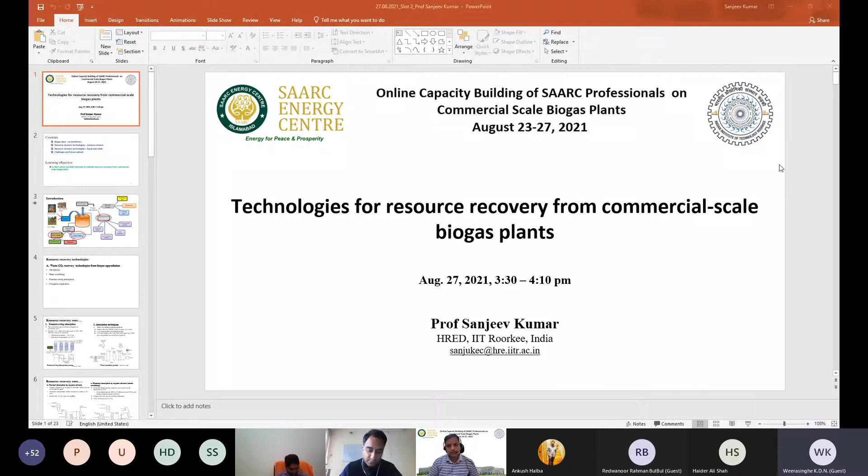So I was talking about the problem with the commercial viability of biogas plants. Until and unless we recover the resources from the waste stream of the biogas plants, a commercial scale biogas plant cannot be a viable option. So that's why I've taken this short lecture on this topic, on technologies that can be applied for resource recovery from commercial scale biogas plants.

The content covered will be like biogas plants as a biorefinery approach. When we are extracting more than one kind of product from a plant, it may be considered a biorefinery, particularly when we are talking about bioenergy engines. Then resource recovery, like the gaseous streams that are available in biogas plants.

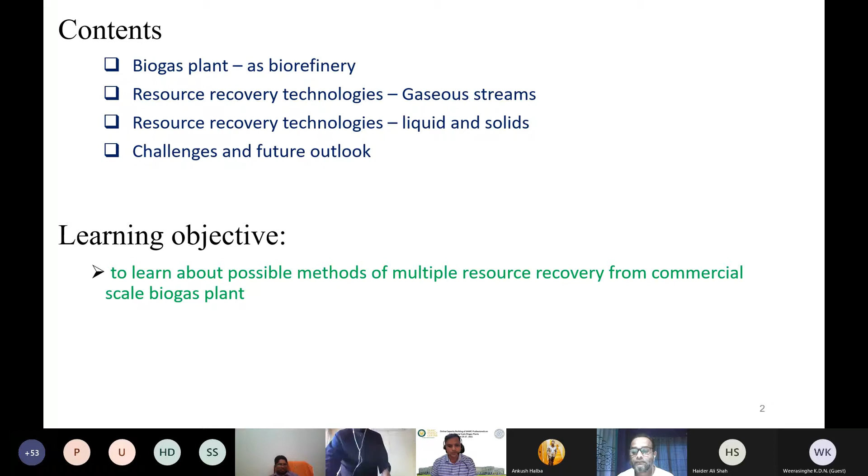So those will be taking some discussion on that also. And then the solid and liquid part, and the challenge in the future outlook with respect to resource recovery. The overall objective of this lecture is to have some idea on the methods that can be applied for

the resource recovery from commercial scale biogas plants. I think this picture is known to everyone, everyone knows what is happening here. But the interesting thing is that these three things - the CO2 coming out from the biogas purification unit, and the digestate, either the liquid part or the solid part - these are considered as waste.

Usually from the biogas enrichment unit or the biogas purification unit, CO2 is directly discharged to the environment, which is causing lots of problems. At the same time, the slurry, in some cases, is being used as a fertilizer. In some cases, the amount of generated slurry is too much, it cannot be applied completely to the field, so in that case it again creates some problem.

So I believe that rather than looking at these streams as waste streams, we should focus on recovering the resources. As we know, the solid and liquid are rich in nutrients, so if we can have some technology for recovering the nutrients from these systems, it will be very good.

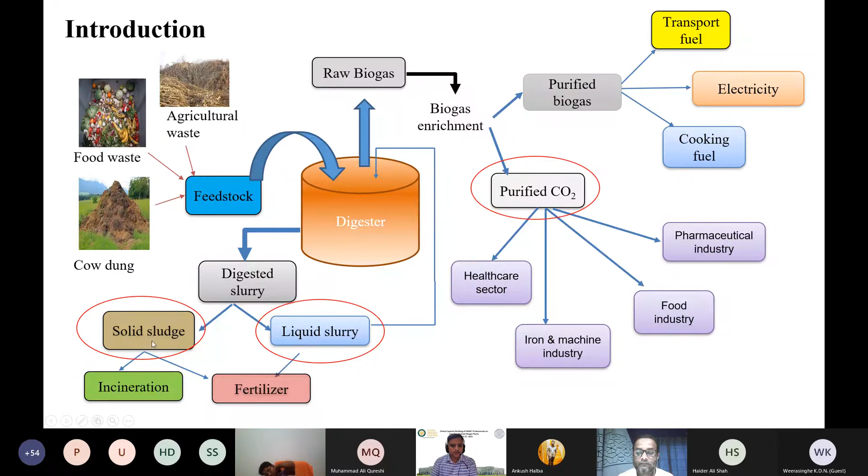Similarly, there are several commercial applications of CO2, like healthcare, iron and machine industry, food industry, pharmaceutical, etc. So if we can purify the gas which is coming out from the biogas enrichment unit, that will be good - we can use it for commercial applications and then sell it. So I will be talking about these three options: solid, liquid, as well as purified CO2.

Coming to the gaseous resource recovery, we know that there are several methodologies by which we can purify the methane. When we talk about biogas purification, we always talk about methane recovery, we never talk about CO2 recovery. What we do is use some technology for improving the concentration of methane in the final biogas or

the compressed biogas which is coming out from the enrichment unit. And what we do is release the CO2 to the environment for the regeneration of the material that is being used for the purification of the biogas. So that is the common practice in most commercial plants throughout the world.

But this release of CO2 to the atmosphere, either in water form like carbonated water coming from the water scrubbing unit - when it comes to atmospheric pressure, the CO2 is released. So the focus should be on how we can utilize that waste stream of CO2 into a marketable product.

So these technologies, those available for biogas purification, the same reactor can be used for the recovery of CO2, but we have to manage how we can collect that CO2 and how we can purify it. So these are the methods: absorption method, water scrubbing method, pressure swing adsorption, and cryogenic separation. I'll briefly cover these things.

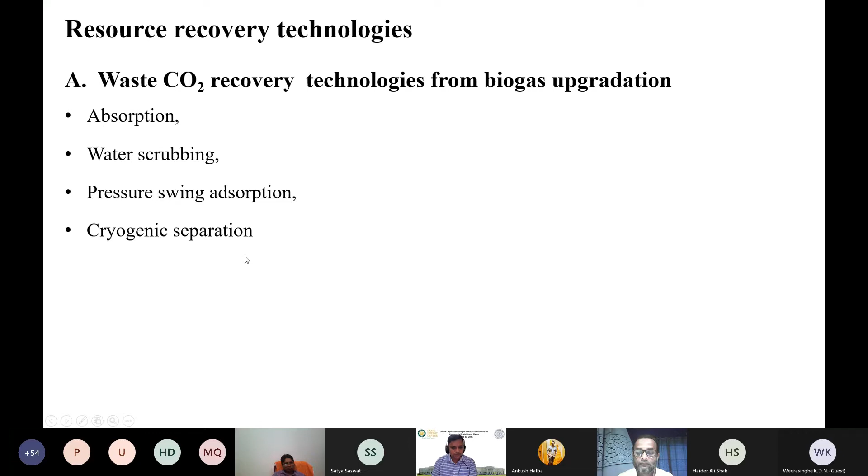If we talk about pressure swing adsorption, usually the gas molecules are trapped on a molecular sieve. When we pass the gas through different towers, the impurities in the biogas like CO2, H2S, ammonia, and vapors will be adsorbed in the adsorbing material. This is how we are getting the methane.

Then during the regeneration stage, this gas, known as the exhaust gas, is released to the atmosphere, having a high concentration of CO2. So in this case, our focus is to recover that CO2.

Similarly, in case of absorption techniques, the first class of absorption technology is water scrubbing, where we usually use the dissolution of gases and vapor in the liquid. The principle is based on how the gas can be solubilized in the liquid phase or the vapor can be solubilized, and it is done at low temperature and high pressure.

During this process, the CO2 and other acidic and basic impurities in the gas are absorbed in parallel, and the biogas is cleaned - we can say the biogas has been enriched.

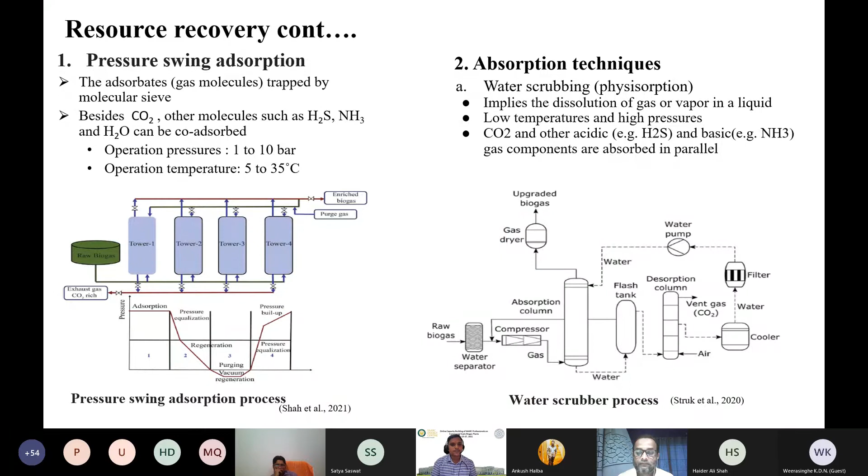Similarly, there are physical methods using organic solvents. There are several marketable solvents available in the market, for example polyglycol, dimethyl ethers - those serve as an absorbent, being the organic reagent. They can selectively absorb CO2 and some of the impurities from the biogas, and we will be having this off-gas which again has a high CO2 concentration.

Similarly, coming to chemical absorption by organic solvent, in that case we use amine - for example, monoethanolamine is one.

And there are some other examples also. These are the compounds used in chemical absorption by organic solvents. Again, we have the off-gas, which contains 80 to 90% of the CO2.

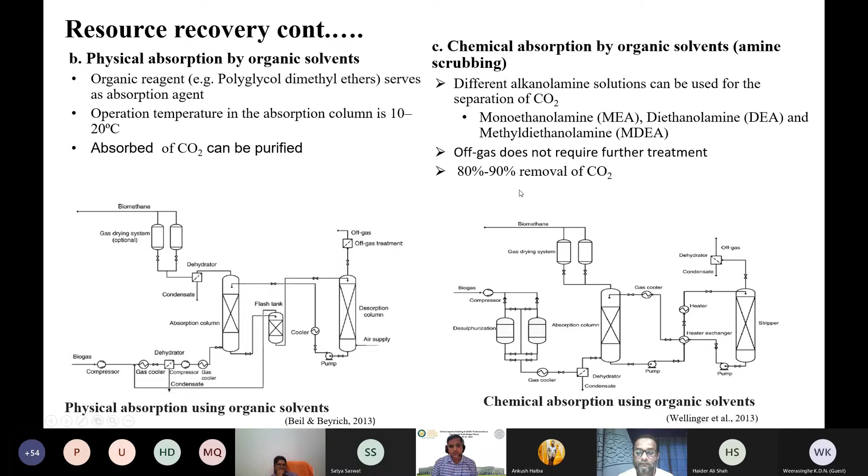We have seen that in most cases, when we talk about membrane separation or cryogenic separation, what we are doing is removing the CO2 and impurities from the biogas and releasing it to the atmosphere as exhaust gas or off-gas. But I will share one case study of how people have worked on this waste CO2.

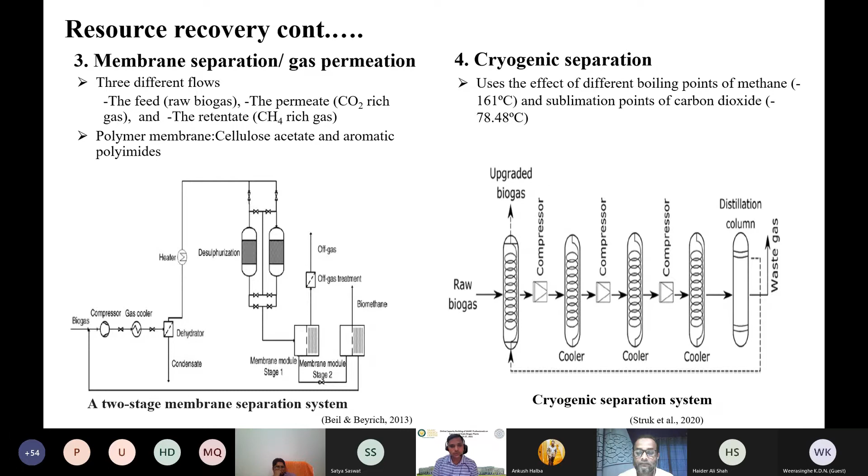Sometimes called bio CO2, it can be converted into food grade CO2. This is an example, the case study of Korskro biogas plant in Denmark. They have been producing food grade sustainable CO2 from a large scale biogas facility.

Coming to the brief background of the plant: they have about 1 million tons of biomass, which contains more than 80% animal manure, and they are able to produce around 49 million cubic meters of biogas per year.

With respect to the utilization of biogas, they are upgrading it to biomethane, meaning they remove the CO2 and inject it into the natural gas grid. Now, interestingly, the CO2 is captured and transferred to the CO2 facility.

After that, the quality of the CO2 will be food grade, because they have claimed and analyzed that almost all impurities are removed, whether nitrogen compounds or H2S. Everything has been removed from the bio CO2 or purified CO2.

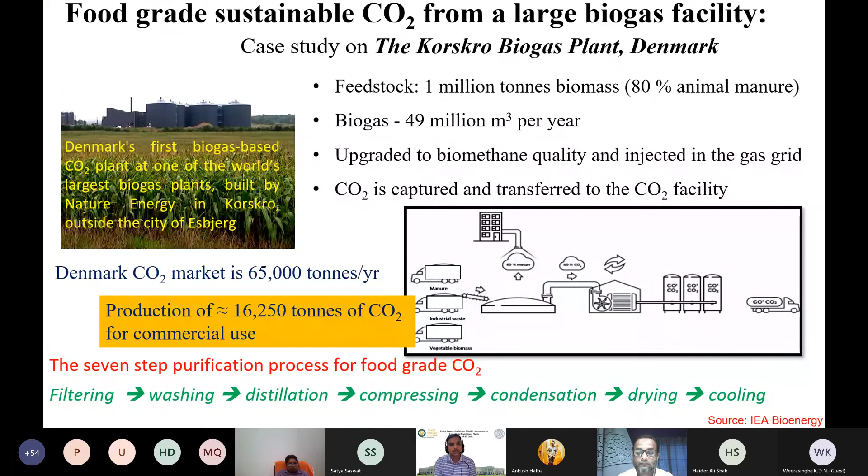Coming to the slurry part, which is very problematic in some cases, because if released to the environment it will create problems for soil and water bodies. This digestate can be used directly if it is in small amounts, or it can be processed into different product components if it is in huge amounts.

The aim of valorizing the digested slurry is to reduce the nutrient load on the remaining effluent and produce marketable biofertilizers. I have seen some plants, one of which we will see in a live demonstration, that have produced more than 40 different products based on biogas slurry.

It should also be processed to reduce the volume of effluent. Sometimes there is technology by which we can recover nitrogen or phosphate from the total liquid, and the liquid can be recycled.

This results in reducing the transportation cost, because the solid part can be easily handled. The problem is with the liquid part, which is very difficult to handle due to logistic issues, like storage and transportation requirements.

And sometimes if we pack it into a small marketable product, people have reported that even after packing it into the bottles, there may be some cases where the biogas keeps producing in that liquid. So there are some challenges with respect to the biogas slurry.

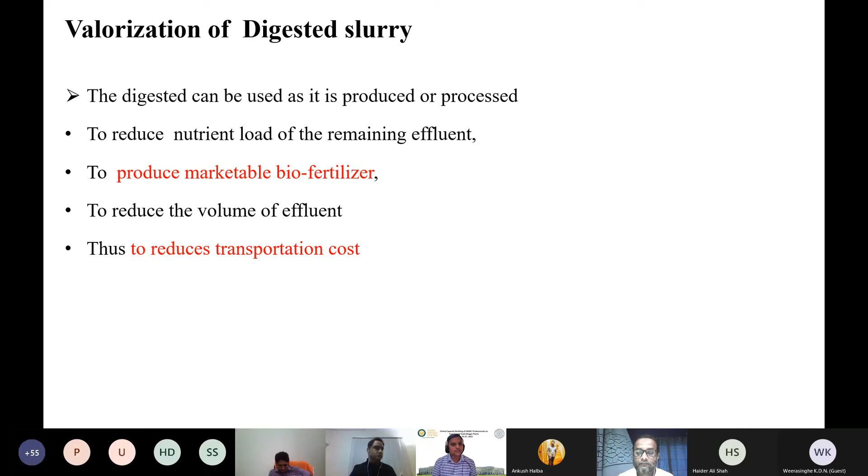So when we talk about digestate processing, one option is digestate conditioning. In that case, we are improving the quality to meet the marketable product. Fertilizer products are available in the market, so we have to meet the quality of the digestate at par with the other chemical fertilizers. And for that we need to do the treatment.

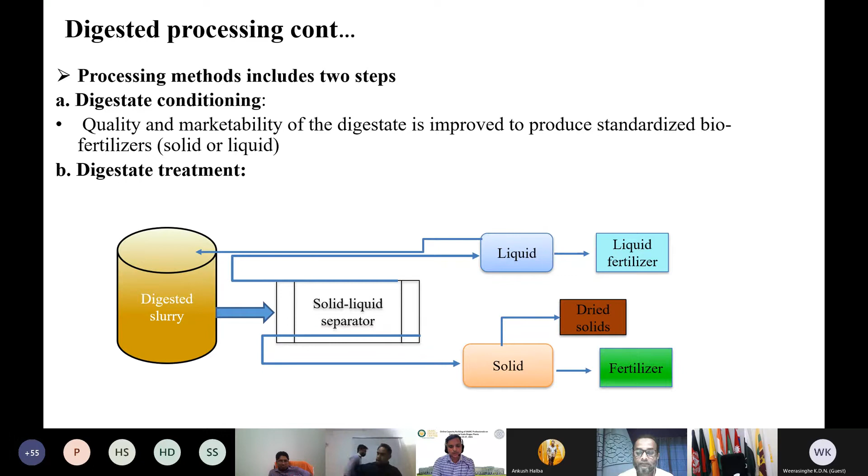So first thing is that we have to use some separator. By using the separator, we can get the liquid part and the solid part separated, and then the solid part we can dry, and obviously during the drying, some of the nutrients like nitrogen and phosphorus may be lost. Or if there are nearby agriculture fields, we can utilize that. And some methods will be there which I will be discussing soon.

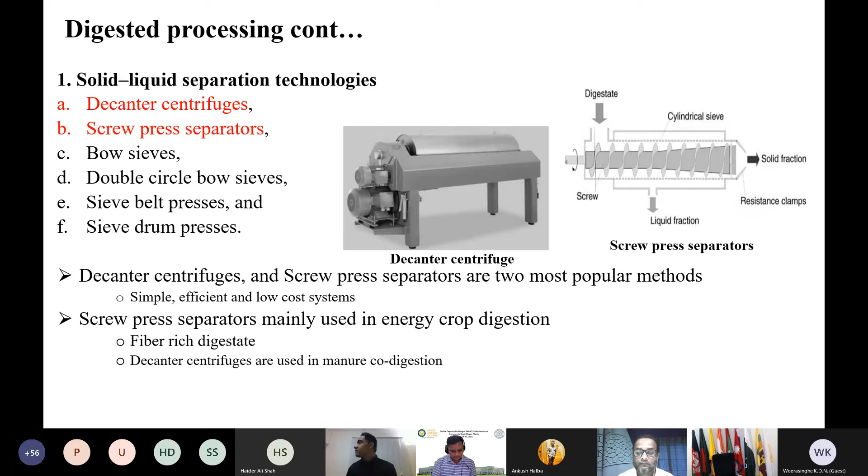So the first stage after we get the biogas slurry is to separate the liquid and solid. We have different machinery that can be applied, but in most of the cases, the solid removal from the liquid part is not very efficient. Even the effluent coming from the decanter centrifuge or screw press separator will have a large amount of suspended solids. That is very difficult to handle, and that will go into the liquid part. The solid part can easily be handled in that case. So these are some examples of liquid-solid separators.

Then the solid and the liquid fraction can be processed. For example, the solid fraction can be used as a soil improver in the nearby area, or it can be taken for composting. It's always good to do the composting before you use the biogas slurry in the field, because the organic fraction in the digested slurry will be low.

So if you are composting it with organic fibrous materials such as wood chips, the organic content in that fertilizer will be improved, and the nutrient availability will also improve because materials like dry leaves and grass improve the water absorption capacity of the slurry. So water retention will be there, and the nutrients will remain in the final product itself. Otherwise, when you dry the slurry directly, there are chances that nutrients will be lost due to the drying.

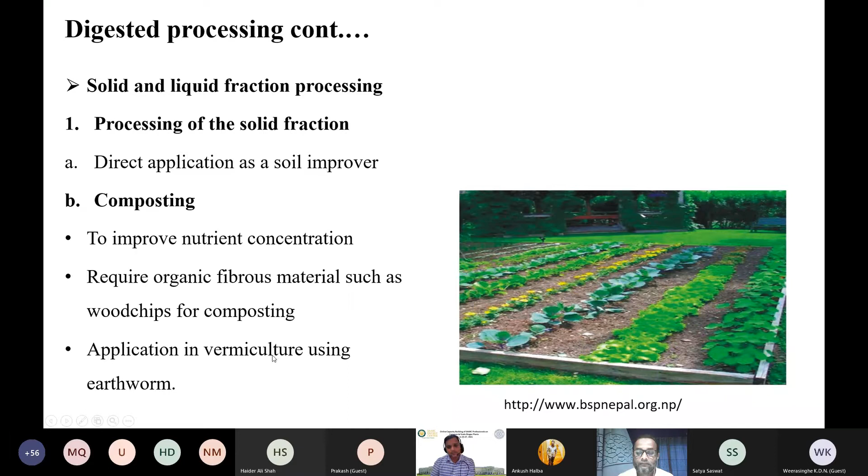Another technique like composting is vermicomposting. With the help of vermicomposting, the slurry can also be processed along with other waste, so that we can get good quality compost or fertilizer.

Drying is one option. As I told you, it can be done through different routes, like solar radiation. And sometimes if the biogas plant has a combined heat and power unit, they will be generating excess heat that can be utilized for drying the slurry. But it should be noted that whenever we dry the solid part, some of the nutrients will be lost. And the dried slurry can be used in different applications, including horticulture and gardening.

And one good example is mushroom cultivation. When we go for mushroom cultivation, we have to use agro residue. Along with the agro residue, if we use the dry slurry or the dry part of the digestate, that improves the mushroom cultivation.

And coming to the processing of the liquid fraction, we can use it directly if it is feasible. But if we have to transport that complete liquid to a different location, obviously the transportation cost will be very high. And if the volume of this liquid fertilizer is very high, storage will be a problem. And as I told you, there are cases where biogas keeps generating from the liquid part of the slurry, which creates lots of problems. So it's better to process it.

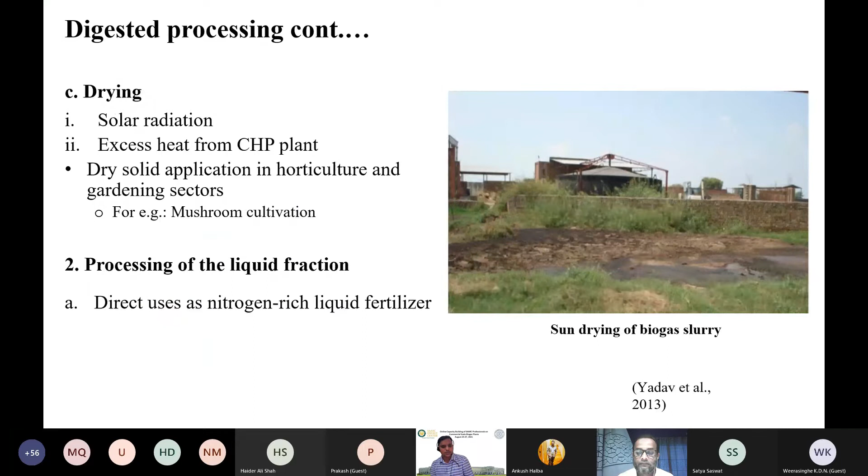In some cases we can do ammonia recovery from that liquid part. Ammonia stripping is a process which can be applied to the liquid part for recovery of the ammonia, and then the ammonia can be utilized for making fertilizer. It produces low pH ammonium sulfate. This low pH ammonium sulfate will be a very good fertilizer in case the soil has alkalinity or neutral reactions.

So sometimes we have to decrease the pH of the soil, and the ammonia recovered from the liquid part of the digestate can be used to make ammonium sulfate with low pH, and we can use it as a fertilizer in some cases.

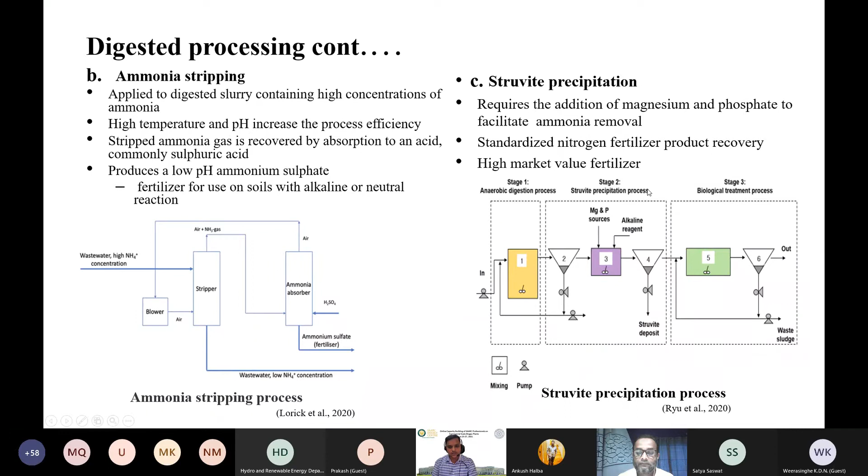nutrients. So one thing is that we are recovering the slurry part, we are separating the liquid and solid. That is one thing, but ultimately, just to reduce the volume of the liquid part, we should focus on the recovery of the nutrients, and we can concentrate, we can crystallize them, or we can use them along with some salt, and then we can use them as a fertilizer. Like here, we are having the nitrogen fertilizer or ammonia fertilizer. In the second case, when we are focusing on the phosphate, we can get the phosphate as a fertilizer. So these are some options that can be applied in the field also.

Now one more thing which I missed to mention: we are talking about the recovery of nutrients, the recovery of fertilizer, the gas recovery. But what about the water? You all know, to operate our biogas plants, we have to dilute the substrate. In case of cattle dung, we have to mix it with an equal amount of water to make a slurry. So when biogas plants are at large scale, obviously their water requirement will be very high.

So there have been some studies where people are talking about recycling part of the liquid digestate. It can be done, people are doing it, but we cannot recycle the complete volume which is coming out from the digester back to the digester. In some cases, it may create ammonia inhibition, like ammonia accumulation may occur in the reactor, and in some cases the volume will be reduced because of this extra liquid part in that reactor.

So to avoid this, we should have some purification technology by which we can purify the water after recovering the nutrients. We should purify it, and we should look forward to recycling, or at least to using it in the process, including cleaning of the utensils in the plant or the pipelines, as process water.

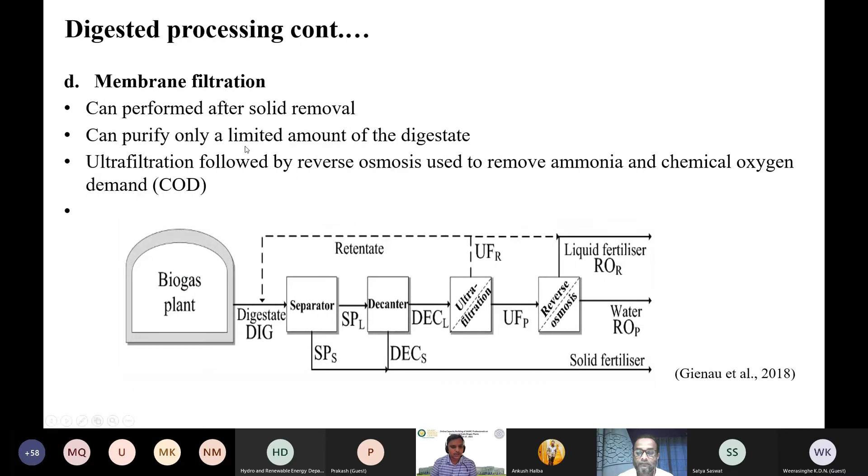Related to this, I have got an interesting case study which I'm sharing here. It's a plant in Switzerland. They are based on manure, bio waste, and industrial biogenic waste, and their total production capacity is around 3.4 million cubic meters per year. They are converting it into biomethane, giving it to the gas grid, and saving around 19 gigawatt hours of natural gas annually with one plant.

And this is the input and output. You can see that pig manure is the main waste. Then they have the bio waste also. Total input is around 60,000 tons per year, and the outputs are written here, they are getting the solid and the liquid part also. And the biogas cleaning is based mainly on PSA, pressure swing adsorption.

And the beauty of this process is that the overall performance of the plant is very good in terms of recovery of different components, because they are selling the liquid part into the market as a liquid fertilizer. They are collecting the solid part and making organic fertilizer out of that. At the same time, they are treating the water and recycling it. You can see they have the ultrafiltration. The solid part goes through a post-composting process, and they are achieving good quality.

And the liquid digestate they are treating in a series: centrifugation, then ultrafiltration, and finally reverse osmosis. Doing this, they are generating more than 30,000 tons of permeate, the filtered water, which they are using for cleaning purposes in the plant. So this is a live example of how we can recycle the water in the biogas plant.

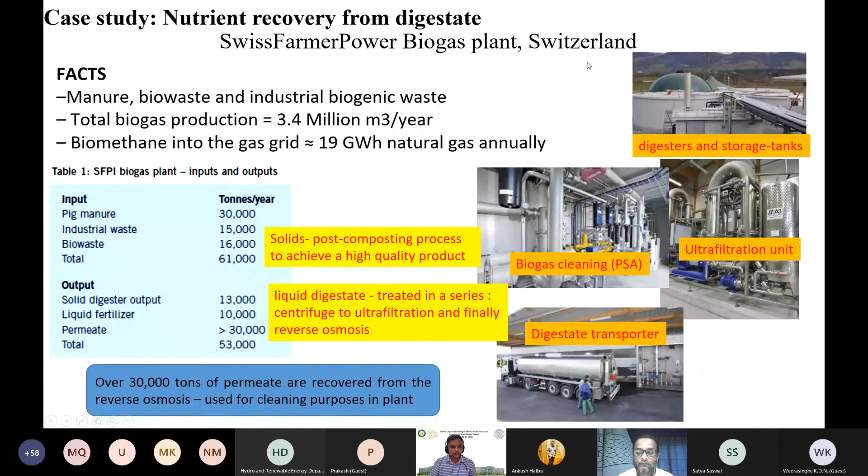Similarly, there is a study in India, in Namakkal district of Tamil Nadu, where there is a waste to energy plant based on anaerobic digestion. They have around 1,20,000 tons of chicken litter, and they have 6 units of 1 megawatt biogas power plants in that location, generating around 20,000 megawatt hours of electricity, which they feed to the electricity grid.

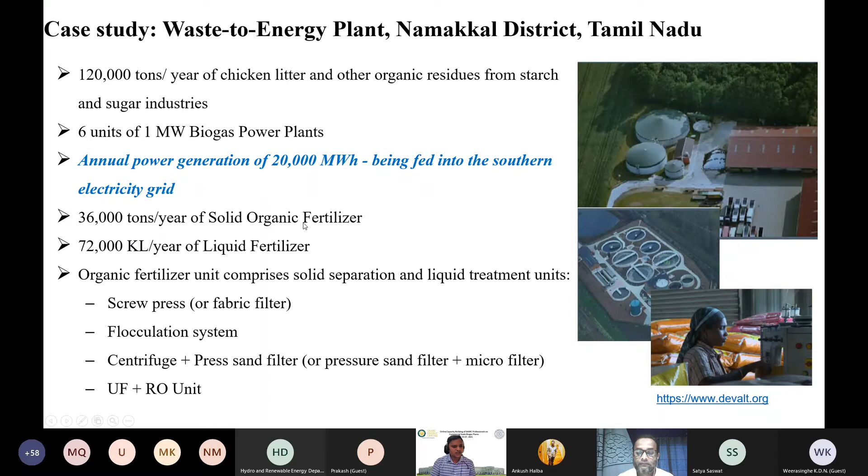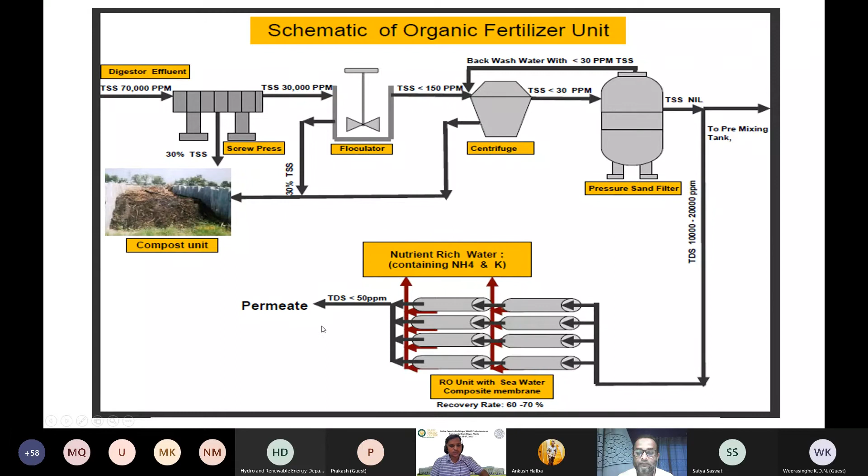Similarly, there are other studies. This is a plant; this report is a little old. You can see more than 10 years of production of fossil-free automotive fuel and certified digestate from food waste. This is the NSR biogas plant in Sweden. These are some of the facts and figures, like the organic waste capacity, methane generation capacity, biogas production, etc. For upgrading, they have 3 units, with PSA as well as water scrubbers. The biogas upgrading unit is shown in this picture. The rate of biogas purification is around 1400 meter cube raw biogas per hour, so they can handle this volume easily.

Now coming to resource recovery, you can see that from 160,000 tons of digested food waste in the biogas plants, around 490 tons of nitrogen, 90 tons of phosphorus or phosphate, and 170 tons of potassium are available for recirculation as fertilizer on an annual basis. So this is how they are recycling. They are recovering the nitrogen, the phosphate and the potassium, and selling it to the market to be used as fertilizer.

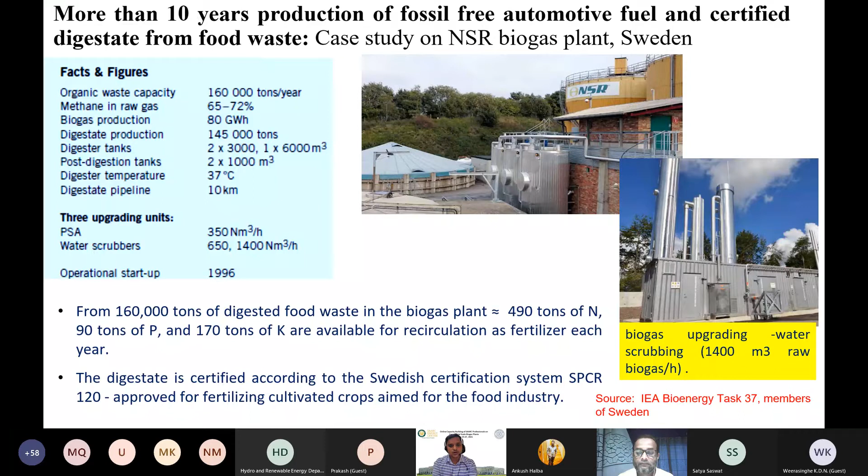The Swedish government has a certification policy, and their digestate is certified according to the Swedish certification system, SPCR 120, and this fertilizer is approved to be used in agricultural fields, particularly for food industry applications. These are some of the case studies I wanted to share with all the participants, so that together we can explore the possibilities. We are looking at biogas production, but at the same time we should also focus on resource recovery.

One more thing: there is a research paper based on constructed wetland technology. Here again they are talking about the liquid digestate, and they are treating it to recover the water. This is a research study; I could not find any case study on that. So research papers can serve as a base, an idea that we can use aquatic plants to recover the nutrients from the liquid part, and recycle the treated water to the biogas plant itself.

So there are some scopes in this direction, based on vegetation plants. This is considered a natural system. These are known as constructed wetlands. We all know there are natural wetlands, and we are mimicking them with aquatic plants and some engineered material in the systems, so that performance can be improved for the removal of pollutants or nutrients from the liquid digestate. This is a very interesting paper, and I've shared the link so that you can download it and learn more about this work.

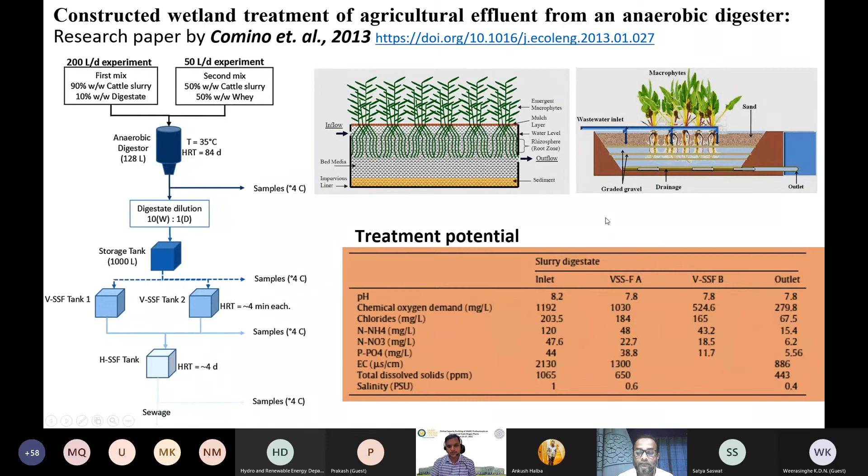The overall challenges and future outlook include reduction in energy consumption, which is very challenging. We have to work together and focus on energy, because biogas plants are meant for energy recovery.

If the energy consumption is very high, obviously it will be problematic in that the economy will be not sustainable. And we should have some techniques to handle this H2S and CO2 in a single unit. In the previous lecture, I talked about the H2S recovery. It can be recovered; I showed a video in which we can recover the sulfate. And similarly, today we talk about the CO2 recovery and how we can use it for the market purpose.

And there are some attempts required for minimizing the cost of biogas enrichment per unit volume of the biogas that is being enriched. And obviously the liquid part should be recycled as dilution water at least. And designing of large throughput and reliable systems that can sustain rapid cycling towards circular economy. Because now this is the era of circular economy, in terms of energy recovery we are taking part in this circular economy, but we have to work on some other aspects also.

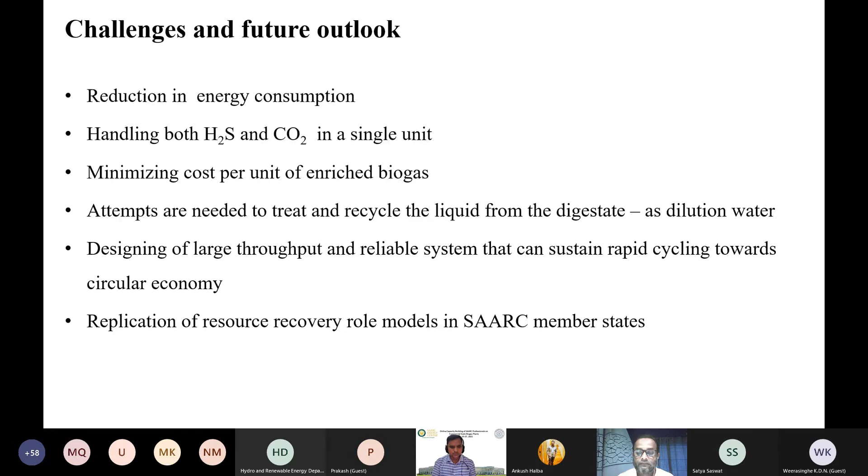And there are some role models available in different parts of the globe. Such role models should be replicated within the SAARC member states. So this is my submission to all the participants. These are the references, and thank you very much.

Yes, thank you so much, Dr. Sanjeev Kumar, for this wonderful presentation. Dr. Ali, I think you are muted again. So now, can you hear me? Yeah, please. Okay, so thank you so much, Dr. Sanjeev Kumar, for this very interesting presentation.

And I think when we talk about the commercial viability of these biogas plants, one of the most important aspects is the resource recovery, which you have very profoundly covered within this presentation. So we are open for questions and answers. We have around 70 participants right now, so if you have any questions, we'll be happy to address them. So any questions from the audience?

Okay, so we have one question. In fact, we have two questions. I would like to take the first one from Mr. Inayat Kabir. Please, could you unmute your mic and speak to the presenter?